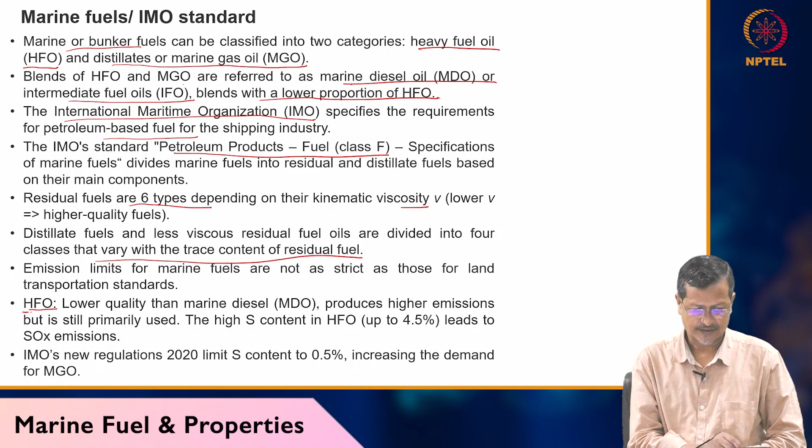HFO or heavy fuel oil, lower quality than marine diesel oil. Marine diesel will be a little bit thinner. HFO produces higher emission but is still primarily used. The high S means sulfur. In HFO up to 4.5%, it is dangerous. It is creating SOx. Normally we write SOx, NOx. So we do not write all these oxides, SO2, SO3.

NOx will have 5 oxides because 5 valencies are there, right? NO, NO2. So instead of writing all the 5, we write NOx, SOx. So many people write NOx, SOx. They will be pronouncing like this. IMO's new regulation 2020 limits sulfur content to 0.5% because sulfur is dangerous. I already told you. Sulfur will be reacting with oxygen.

It will create S plus O2, SO2, SO3 also. I am not balancing left and right side. So SO2, SO3 with H2O will be producing H2SO4, H2SO3. So finally it will be producing acid. So acid will be reacting with your metal.

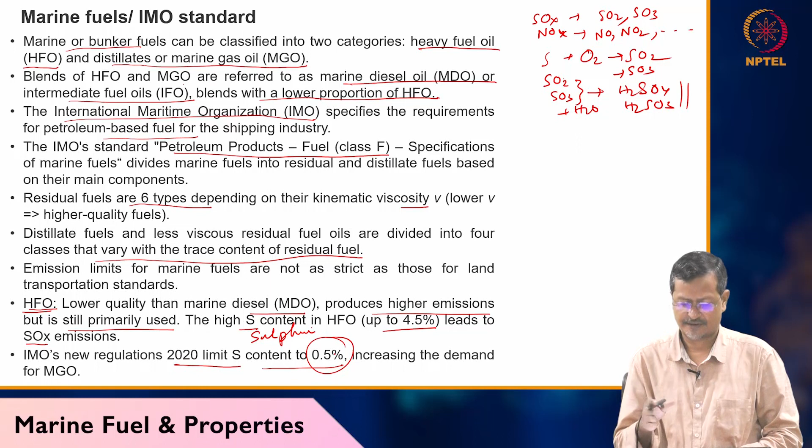So that will be dangerous for the environment, and it will be dangerous for human beings also, whoever is nearby, because this is acid. Acid should not go to your lungs. So they limited this sulfur content to 0.5%, a very low amount allowed, but more than that they will not allow. So every time we are talking about thick fluid, thin fluid, viscosity. So let's get the definition.

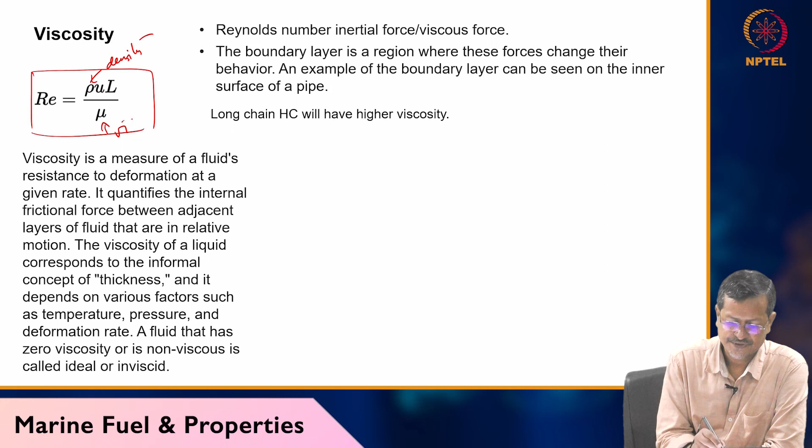So first you learn Reynolds number. Reynolds number equals rho U L over mu, rho density, and mu viscosity, and L is the length, U is the velocity. So if density, velocity or viscosity changes, Reynolds number will be changing. And Reynolds number also has limits like laminar flow, turbulent flow. Laminar flow means more viscous flow, turbulent flow means it will create more turbulence.

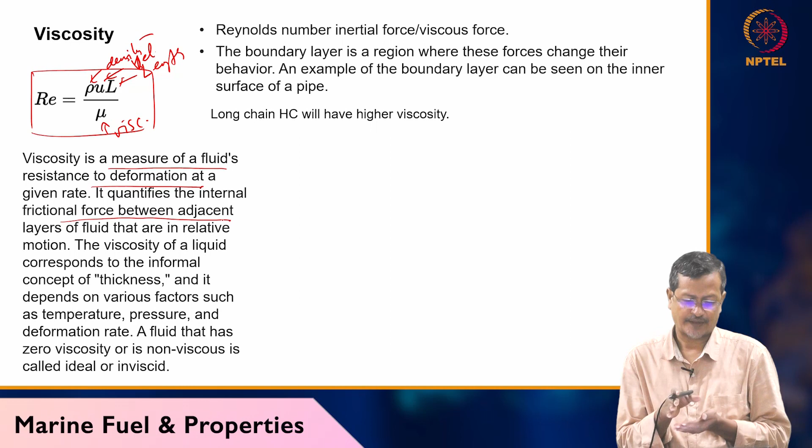So viscosity is a measure of fluid resistance to deformation at a given rate. If a fluid is resisting flow itself, that is more viscous. It quantifies the internal friction between adjacent layers. So if you have short chain hydrocarbon or long chain hydrocarbon, short chain hydrocarbon like CH4, especially in hydrocarbon application for your fuel or lubricating oil, short chain hydrocarbon will have less viscosity.

Sometimes it is gaseous form also, but if you have say propane, butane, pentane, hexane, gradually you will go towards liquid formation, and if you go to, let's say, C18, that range, it will be more viscous, thicker. The chain is so long, it will not try to evaporate. The boiling point will be higher. And because of the long chain, it will be acting as a lubricating oil. So lubricating oil will have long chain hydrocarbon. Very thick fluid will have long chain hydrocarbon, thinner fluid will have short chain hydrocarbon.

Lubricating oil, if it is getting broken in the engine, like say if you have a bike or car at home, after 2 months, 3 months or 6 months you change lubricating oil. What happens? At high temperature, lubricating oil bonds will be getting broken. When it is getting broken, some carbon particles will be produced, and it will be making thicker lubricating oil. So thicker fluid will not work for your lubrication.

For your engine oil, for your fuel oil, thicker fluid will have difficulty injecting into the cylinder. So thinner fluid is better. The viscosity of a liquid corresponds to the informal concept of thickness. So higher thickness means high viscosity.

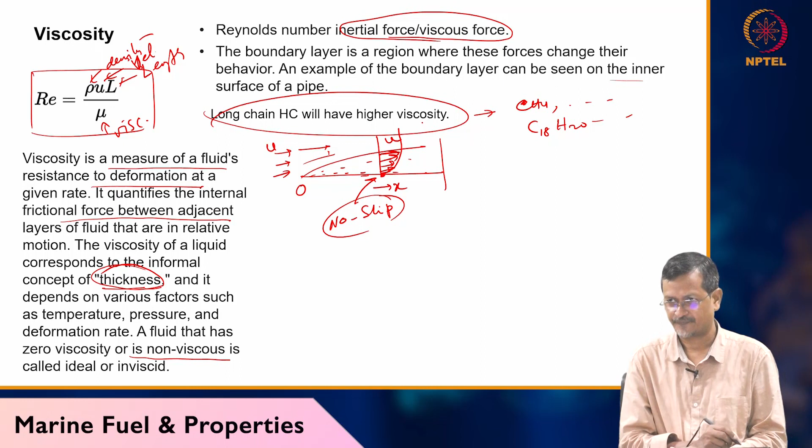So this is called the boundary layer, where the velocity is changing, let's say from 0 to a certain value u. So that changing area is called the boundary layer area. Okay, and in many piping calculations and engine calculations also, sometimes we use this boundary layer theory.

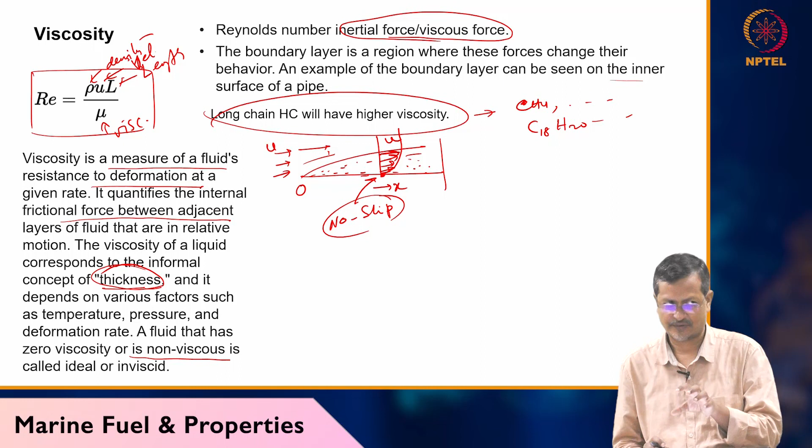Okay, marine diesel oil. So marine fuel viscosity ranges from 1 cSt to 700. So the unit also you should remember. cSt is the kinematic viscosity unit. Okay, another viscosity will be cP, dynamic viscosity. Centipoise, and you should remember to write it like small c, capital P. Here also cSt is written like this, small c, capital S, small t.

So many times I have seen students writing capital C small p, or some other way, or both capital or both small, so all are wrong. You have to write small c, centi means small c as per notation, and P is a scientist's name, so it will be capital P. So Stokes, cSt, centistokes actually. The S should be capital, a scientist's name. So c small, S capital, then t small, that is fine.

Higher viscosity grades are preheated during use. Okay, so if a high viscosity fluid is there, you heat it, reduce the viscosity, then you use it. And whenever you are getting marine diesel oil or HFO, you have to check whether the catalytic cracking method or the visbreaking method is giving that fuel. And IMO regulation will be defining your marine fuel properties, the viscosity limit or emission limit.

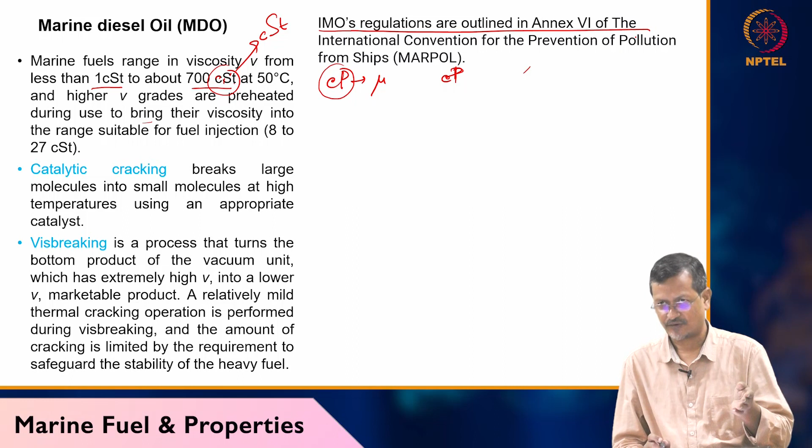Okay, and it will be concurrent, giving information with the regulation of the International Convention for the Prevention of Pollution, MARPOL. So the full form also you should remember. In the exam I can suddenly give it, then you should not say, sir, it is not there in your notes. So I have given it so that I can give it in the exam also.

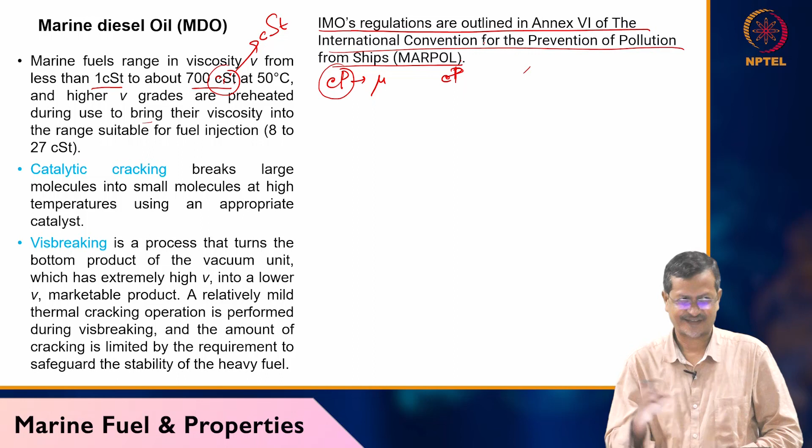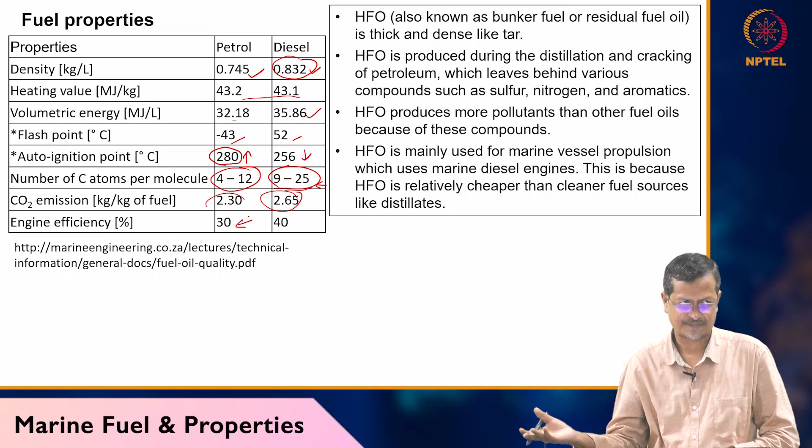So all those factors will be included when you are calculating efficiency. For our approximate calculation, we may not consider everything, but in detailed design, when people are doing it in mechanical and other departments, they will consider all the small factors also. After that, they will get exact efficiency values. Okay, so HFO, also known as bunker fuel.

Okay, combustion. Combustion in SI engine and CI engine will be a little bit different. So in CI engine, combustion will have ignition delay and premix. In the combustion phase, ignition delay is the time interval between the initiation of the spark or other ignition source and the start of combustion in the fuel mixture. So the time delay is called ignition delay.

Okay, so in many cases premixing is required. For example, a carburetor will have lots of premixing. Premixing is the rapid combustion phase. The fuel accumulated in the cylinder ignites, with high heat release. So in a CI engine, fuel is injected, air is already there, so it will be premixed, then burning will start.

Okay, mixing-controlled combustion phase: the burning rate is controlled, heat release is decreased. Late combustion phase: lowest heat release rate, only a small amount of fuel is available for burning. Okay, so the combustion process is complete when you are getting only carbon dioxide and water, but if you are getting more carbon monoxide, then it is not complete combustion, because there is an oxygen shortage.

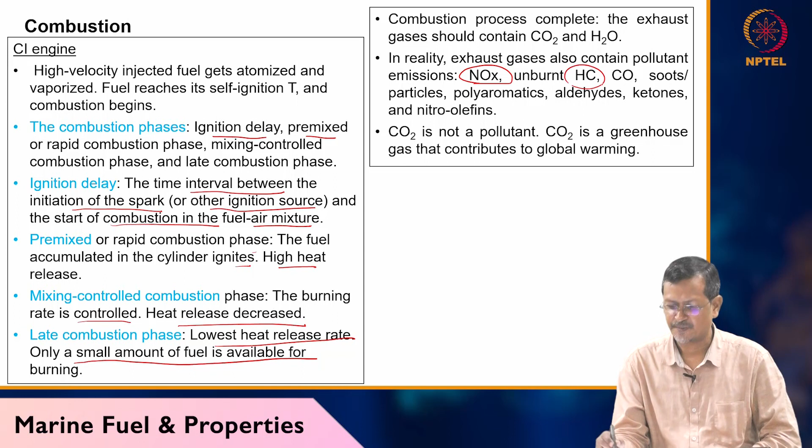Okay, in reality exhaust gas will contain NOx. Why will NOx be there? You have nitrogen and oxygen, high temperature and high pressure, so some nitrogen will be converted into nitrogen oxides. Some unburnt hydrocarbon may be there if engine design is not proper. Carbon monoxide may be created, soot may be created. Soot means unburnt material, ashes, some heavy metal particles, or maybe carbon particles.

Okay, carbon dioxide is not a pollutant. Carbon dioxide is a greenhouse gas. So whenever we are designing any engine, we assume carbon dioxide is not a pollutant. It is already there in the atmosphere, we are exhaling it every time, so it is not a pollutant gas, but it is giving a greenhouse effect.

Okay, so whenever you are considering an engine or chemical reactions in the engine, we assume that carbon dioxide is not harmful; produce carbon dioxide, not carbon monoxide. If you are producing carbon monoxide, that is harmful. So whenever you are running, designing, or buying an engine, you have to see that it is producing carbon dioxide only, not carbon monoxide.

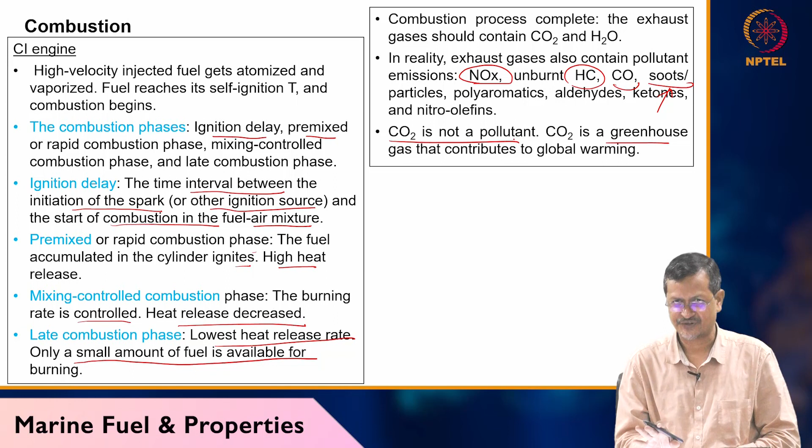Okay, so mixing of air and fuel is required, and compression ratio must be proper. These are affecting the combustion. Spark timing, proper timing, will also be required. Say the system is compressed but the spark is not happening, then things will not work. Those are also important. Turbulent mixing, how properly mixing is done, that is also important.

Load on engine: if it's too much loaded, like bikes or scooters designed for 2 persons but 4 students are riding, then things will not work, and combustion will be affected. Engine speed will also be affecting your combustion system. Fuel characteristics, self ignition, all these things will be affecting your combustion.